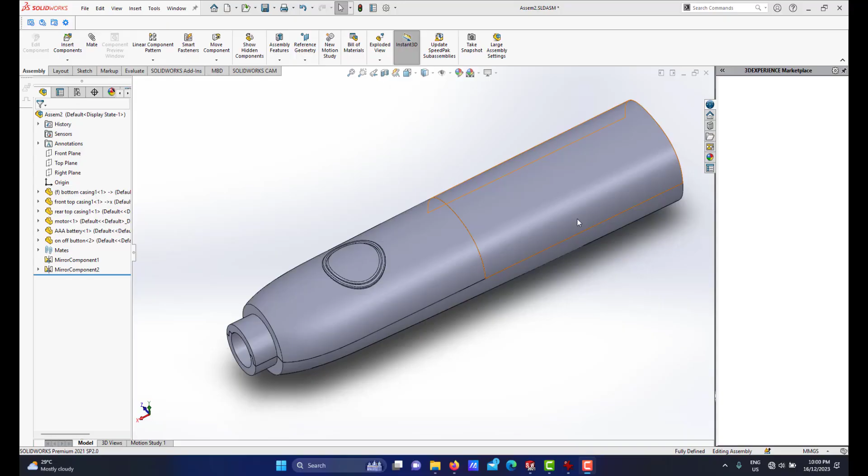Thank you. Alright, this video will be part 9 of my electric eraser Solidworks project. So in this video, I will do another part modeling, which is, if you look inside here, we have a component which is mounted onto the shaft. As shown in this photo, we have this thing. This is called eraser tip holder. It's a hollow cylinder. Okay, I already did the measurement for the dimension for this.

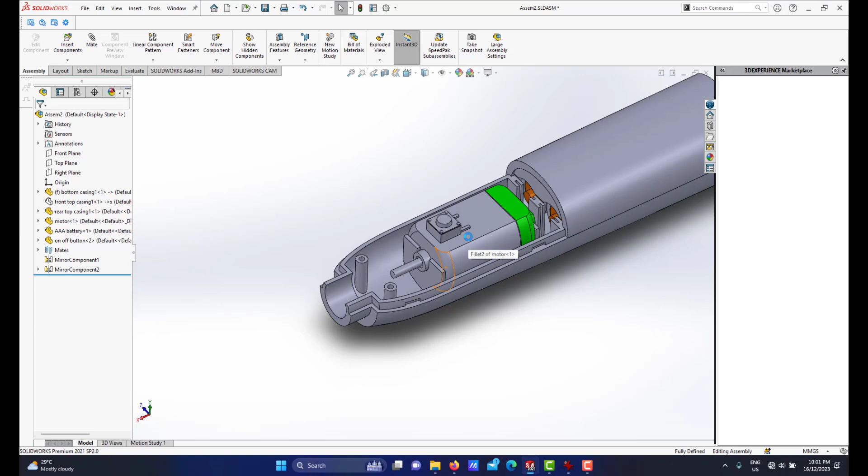Hold on. Okay, this is the dimension. Okay, in Solidworks, what I will do, I will create a new part modeling. For this eraser tip holder, I will do a separate part modeling, as shown in this photo. The dimension is there, diameter 7 here. So I will do it on the right plane.

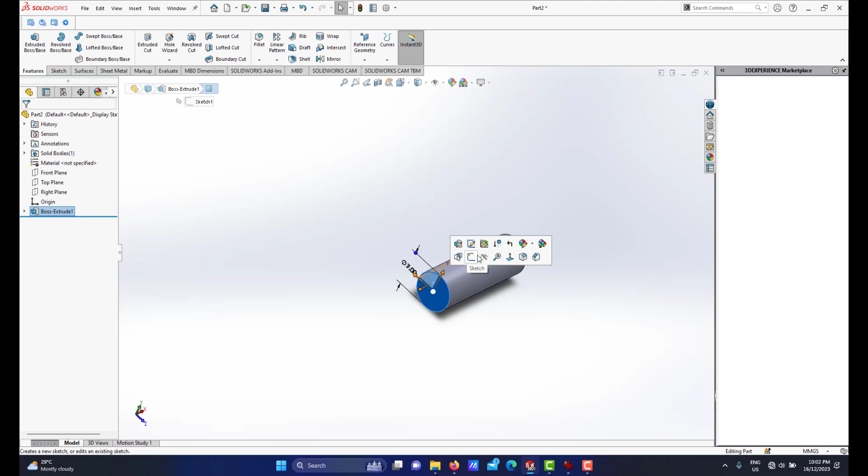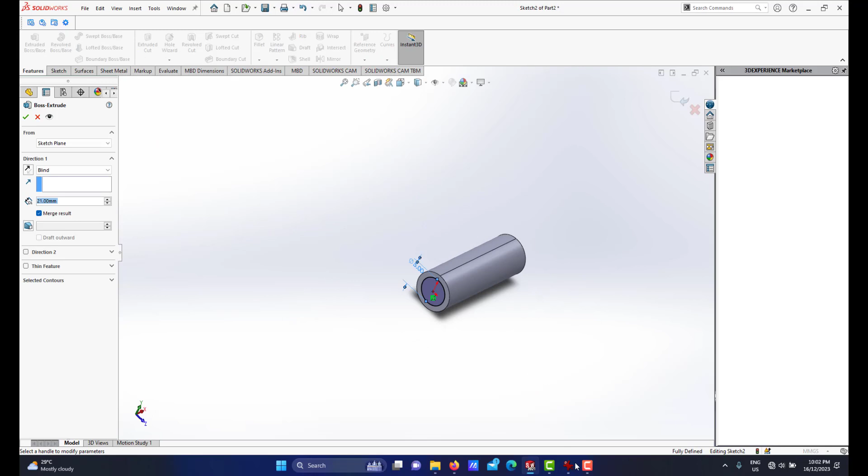I will extrude by 21. Alright, and here I have diameter 5. This one I will extrude by a distance of, I will put it 5 instead of 4.

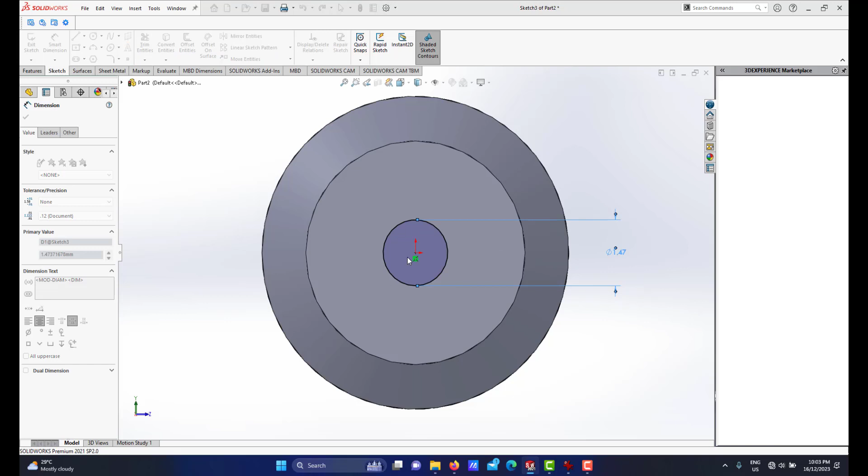Right, so here we have a chamfer. The chamfer will be 1 millimeter. Right, so then, since the electric motor shaft diameter is 2, we have a bore of 2 millimeter. Okay, let me save this as eraser tip holder 1.

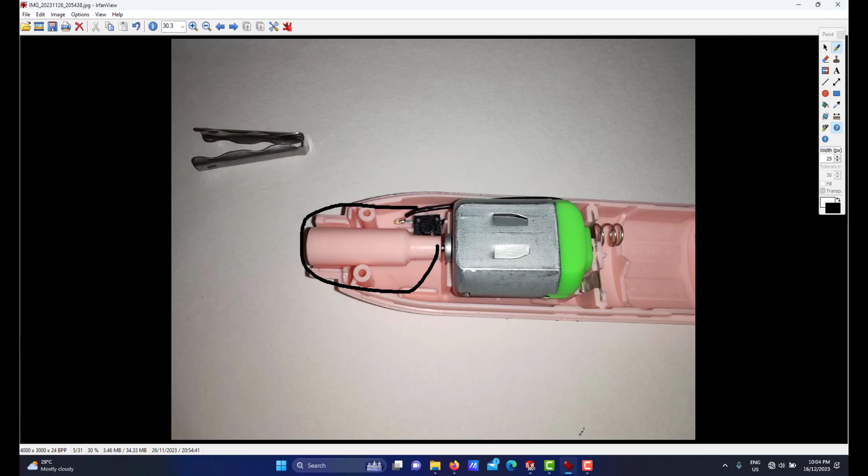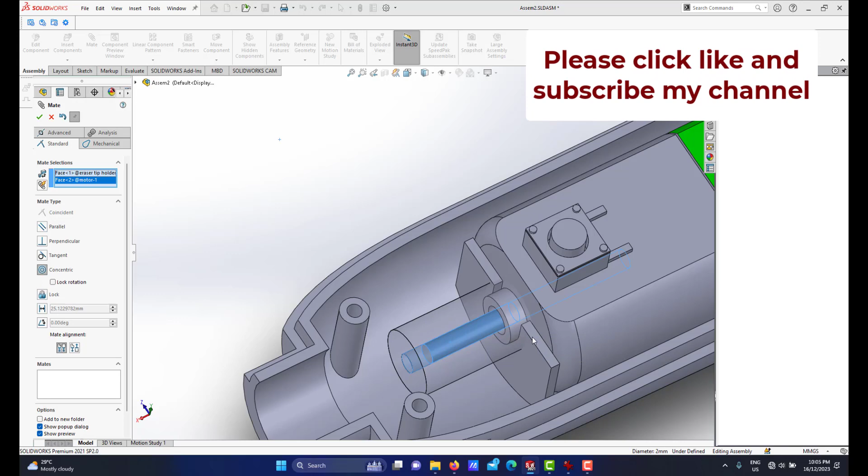Alright, if I go to assembly mode, I will insert this here. If you look in this photo, the side is like this. Then I will do mate. These inner holes will be concentric with this shaft. Then I click OK. I can drag it, and this face will go here. So it looks like it's in line at the same level with this surface. Now I've already done the eraser tip holder.

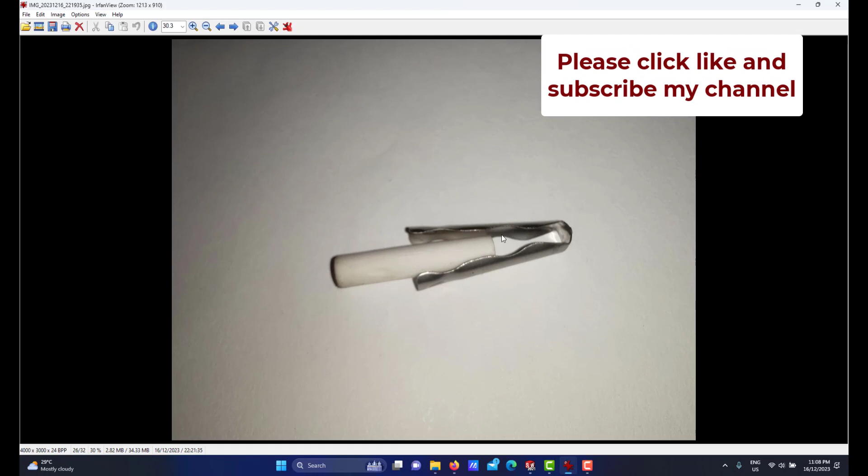Alright, my next move is this component as you can see in this photo. This is what we call the eraser gripper. I will do this component in Solidworks, and I already did a measurement, so I will not do the eraser gripper in this assembly, just a typical part modeling mode. So I already set the diameter at about 6 millimeter and the length is about 25.

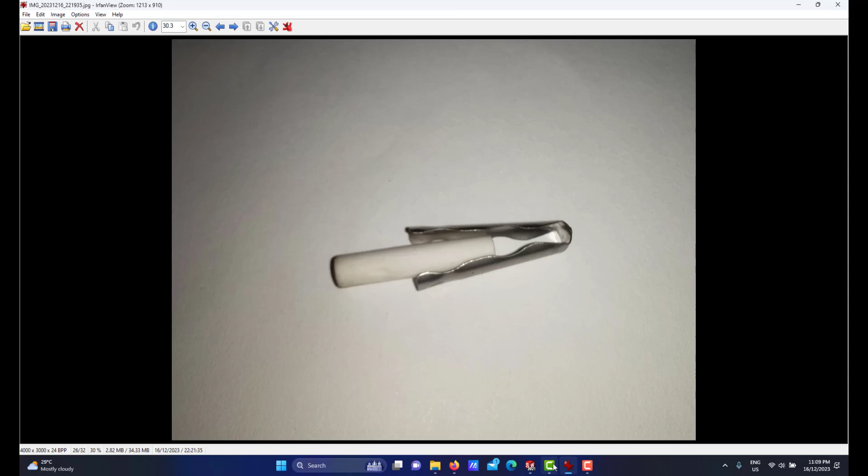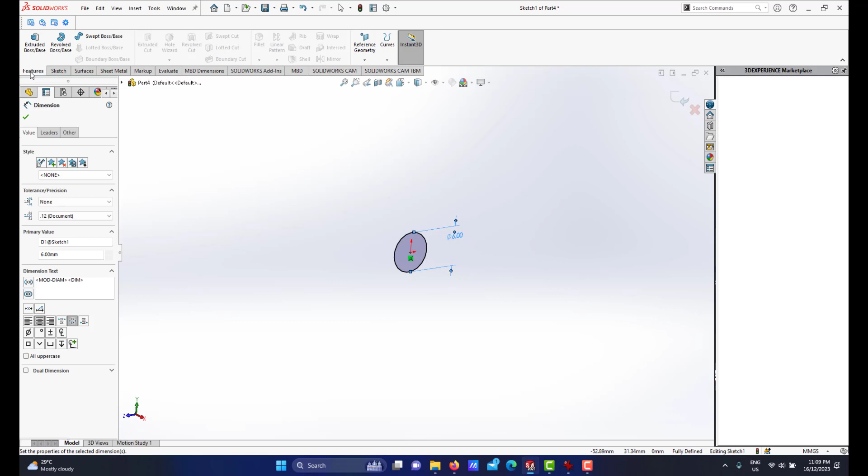Okay, on the right plane I will do 6 and I will extrude 25. Okay, next thing I will do shell. The thickness is 0.2 millimeter since this is very thin metal. As you can see, it's a very thin metal, it's about 0.2 millimeter, if I'm not mistaken.

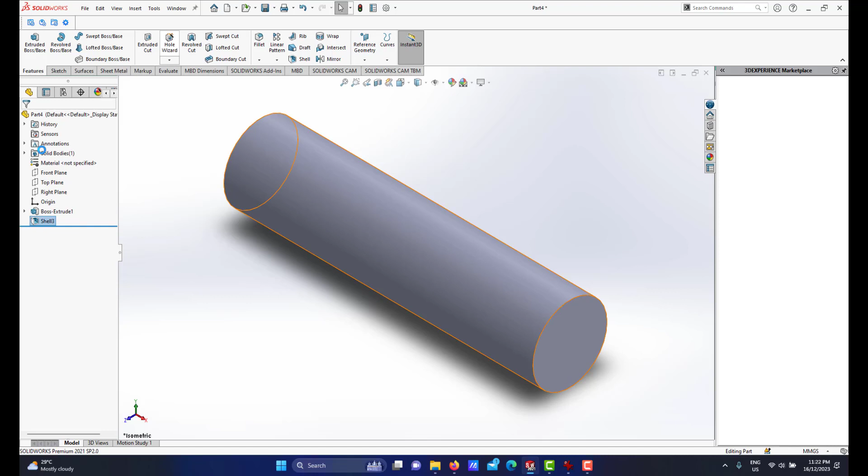Right, so if you look in this photo again, we have kind of like a curve here. It's a cutout. So let me go for standard view. We make it at the front plane. Okay, I go for hidden line view. So what I will do now, I will create kind of like this curve. I will draw a line from here like this.

Hold on. And it will stop here, because later I will do split. But before that, I have to put a relation here. So this line and this line and this line must be collinear, meaning they are in line. Same goes here. This point and this point must be horizontal.

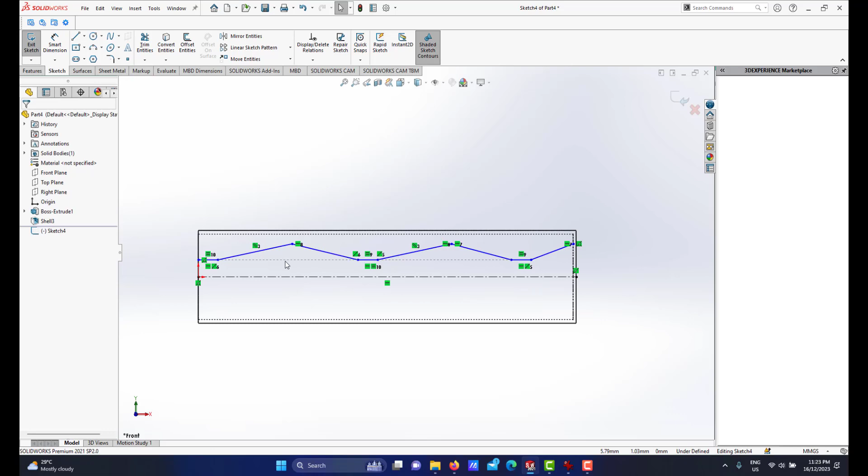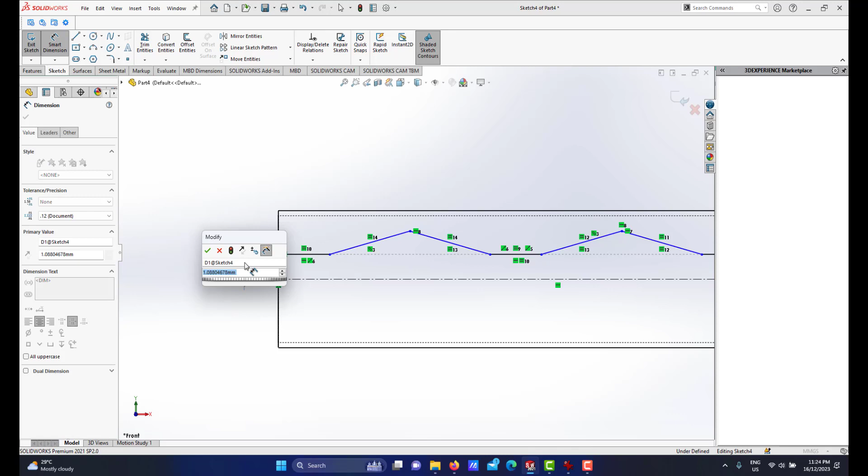All right, it is just a matter of doing some adjustment, and this line, just to make this equal. I just want to make this fully defined by setting the relations, and also all these lines are equal. Right, so now I'm putting the dimension from here to here, let's go for 1. And also from here to here is about 0.5.

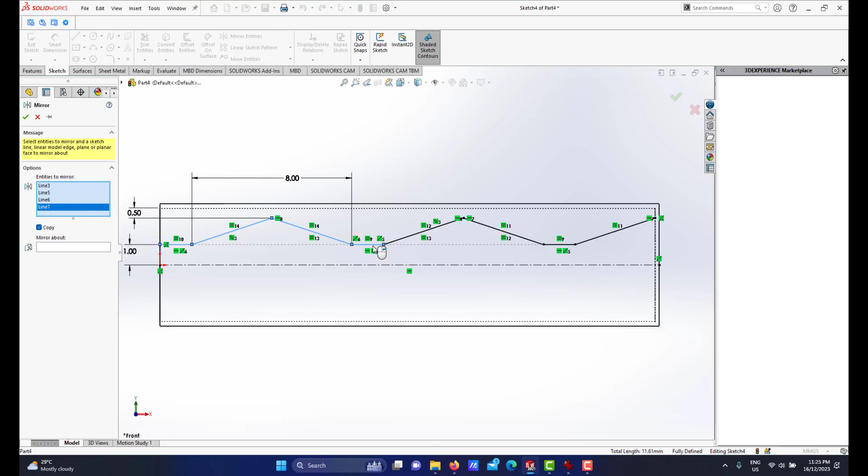And I need to give this, let's go for 8. Right, I need to mirror this. Okay, I will not do fillet for this curve, but I will do fillet when I have done the 3D after cutting out, because if I do fillet, sometimes the sketch will be over defined or there will be some errors. So I will keep it a sharp corner. Then I will do fillet after I've cut out.

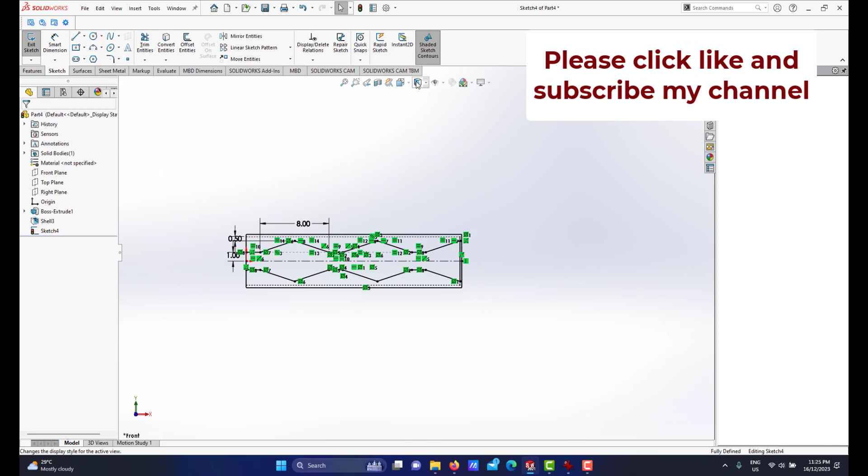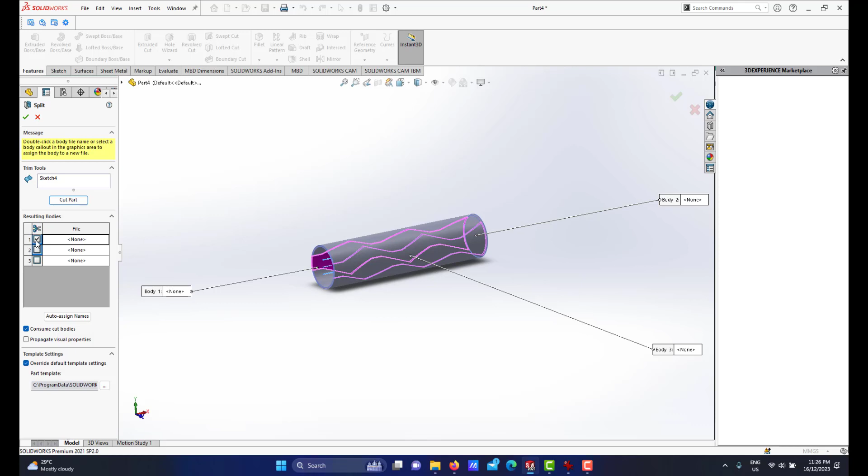So this line should be joined. So I have this. Okay, let me go for shaded view. Right, so this will be my curve to do the split. Okay, I will do split. So I will select this. I will do cut part. I will select the parts that I need to delete. This one and that one. Make sure the consume cut bodies is on. So I have this.

Okay, let me turn off this sketch. I have this, similar to this, but here it's curved, so I can do fillet. All right, let me do fillet. I have a lot of edges to fillet. Let me go for 5 first for all these here. All these corners here will be 5. So here.

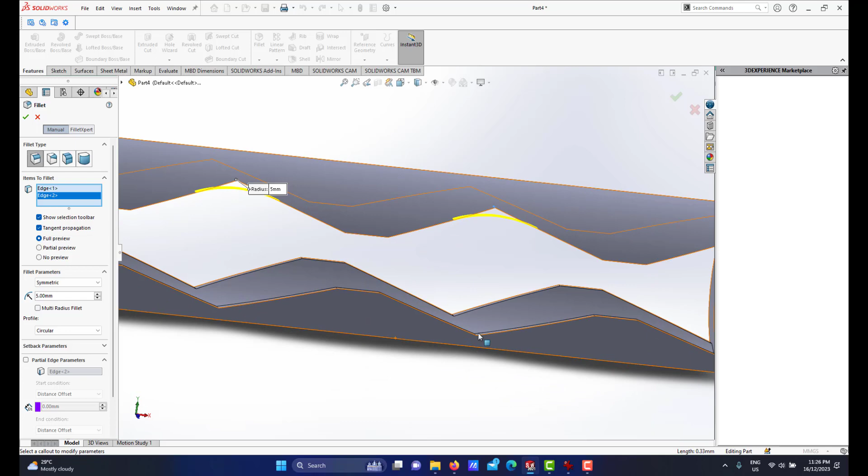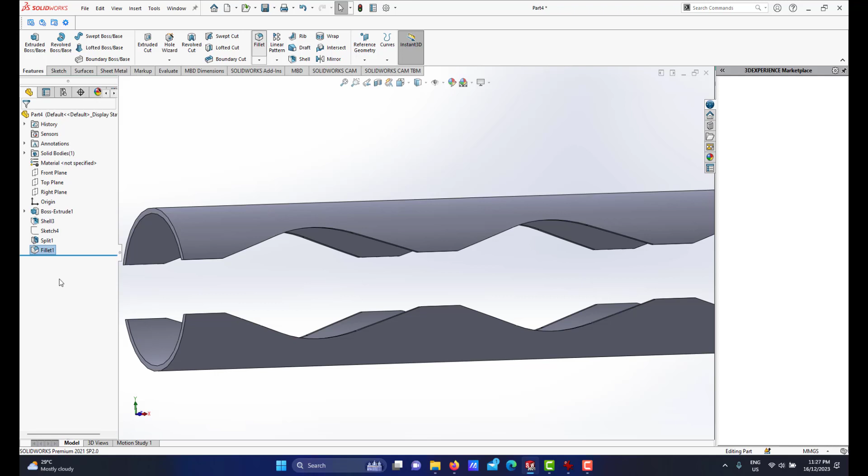Oh, the edge. And also this side. All right. So these will be 5. And the rest of the corners, I'll do another fillet of smaller radius. Let me go for 3. This one.

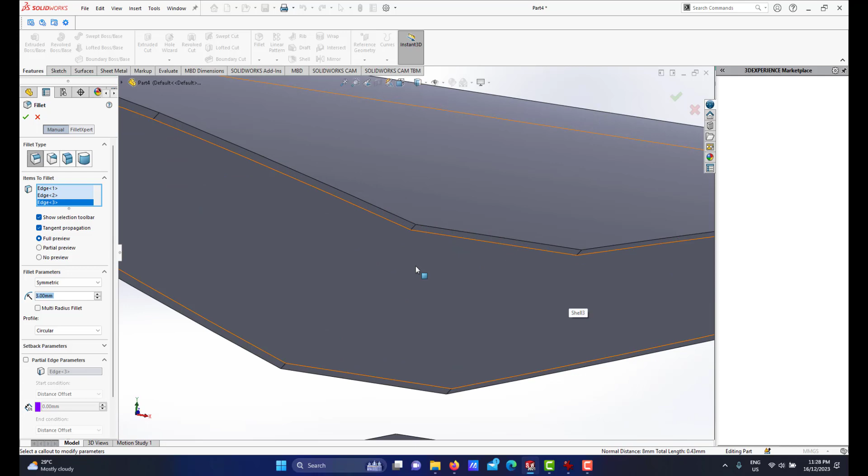Okay, let me pause this thing. Then after I've done, I resume my video.

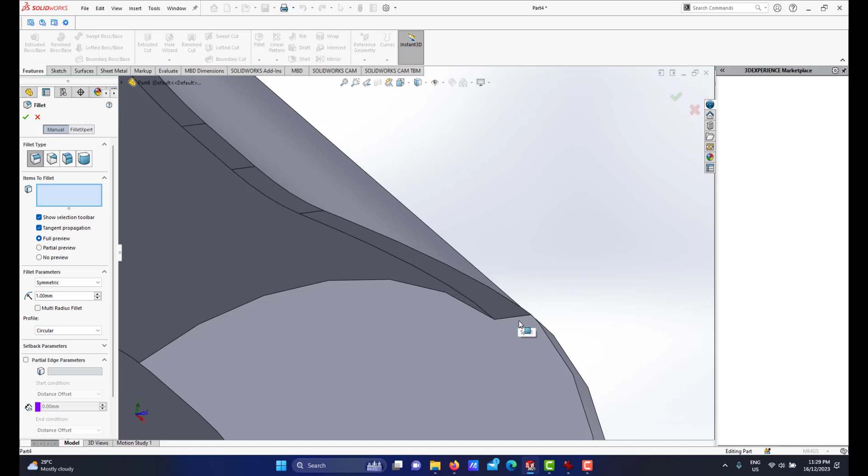All right, I've done fillet all the corners there, so I can have a curve. But for this edge, I cannot give a bigger fillet radius, so I will do a fillet with a small radius. I think the most that it can go is 1 for this edge. Carefully select the edge. Yeah, and also this one.

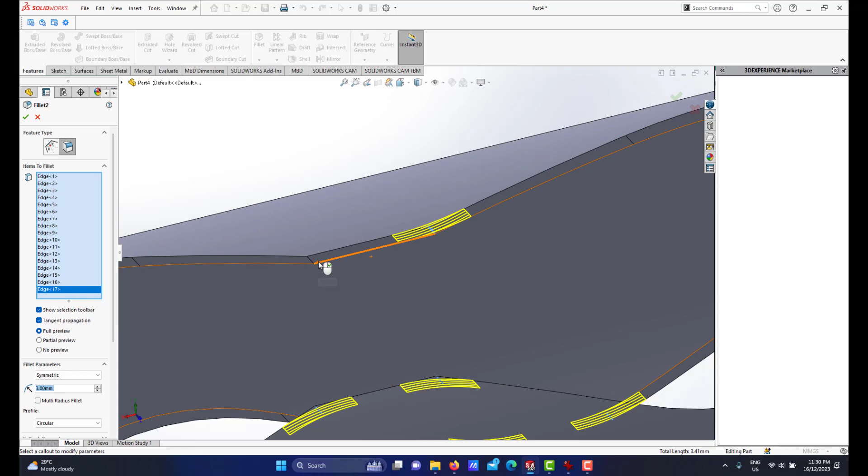All right. Yeah, that's one more curve that I missed. This radius 3 at the top here. This 3, right? Okay, I think it's okay.

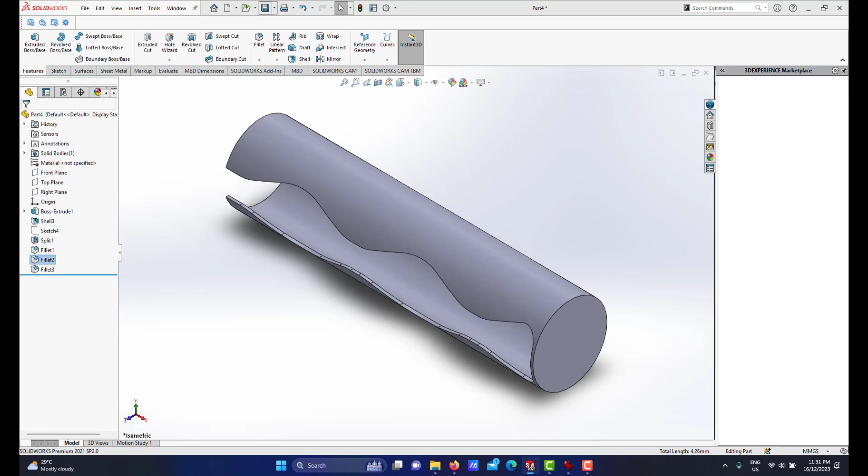It's good. All right, so I will save this file as eraser gripper 1. All right, in the assembly file, I will insert the eraser gripper 1 here.

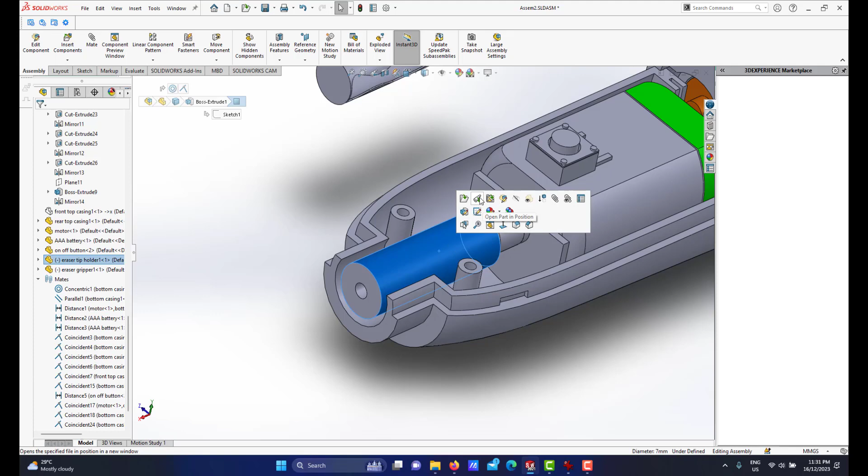All right, just one more thing before I do assembly of this. The eraser tip holder here, this hollow cylinder, actually this gripper will be mounted into here, but as you can see, this is on the bore of the shaft. So what it means is that I need to open back this eraser tip holder.

So I have to create a bigger bore here by the diameter of 6, since the metal gripper will be mounted onto this bore. So I have to make a cutout. Right, I have to make a cutout.

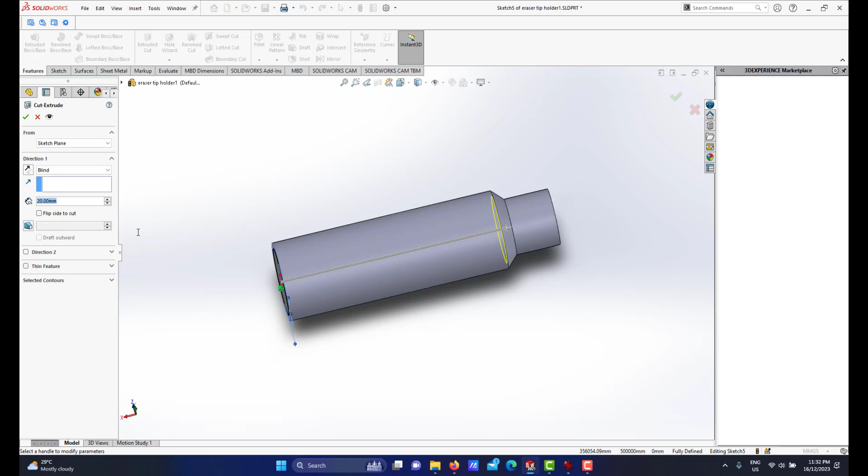I will do an extruded cut up until, let me go for value here, 21. Not 21, I go for 20. Hold on. I go for 19. Okay, we'll cut the hole until 19 depth. Alright, so I have a hole here. Let me save my file first.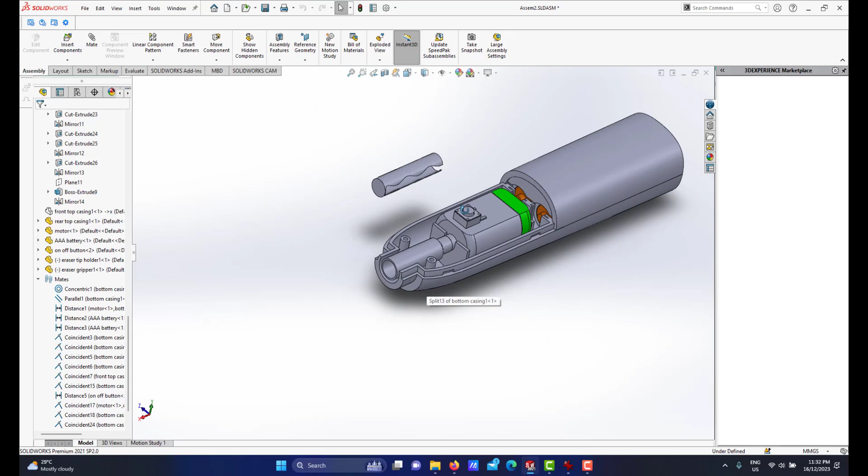Okay, in the assembly, let me go for section view. Alright, I will do a mate setting. Okay, this cylindrical face will mate with this. I click OK. Let me try this thing.

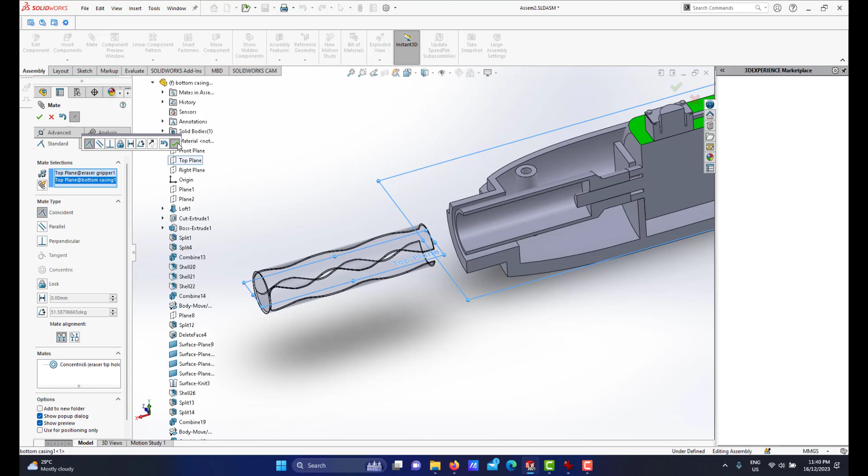Okay, another thing is the orientation here. My next mate setting is that, hold on, let me turn off this. The top plane of this eraser gripper will mate with the bottom casing top plane. So I need this kind of orientation. Hold on. Right.

Okay, another thing about here, there is this face and the end face of the shaft. I need to go for anti-align. Let me click OK. And I click OK. Right, let me click OK first.

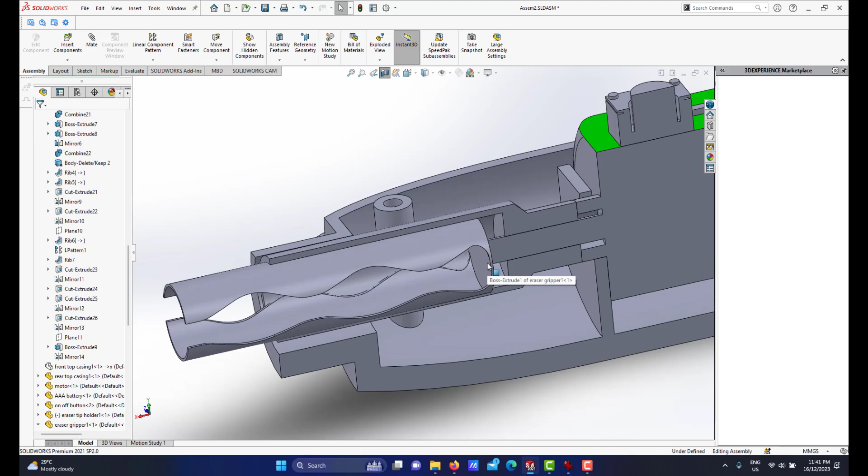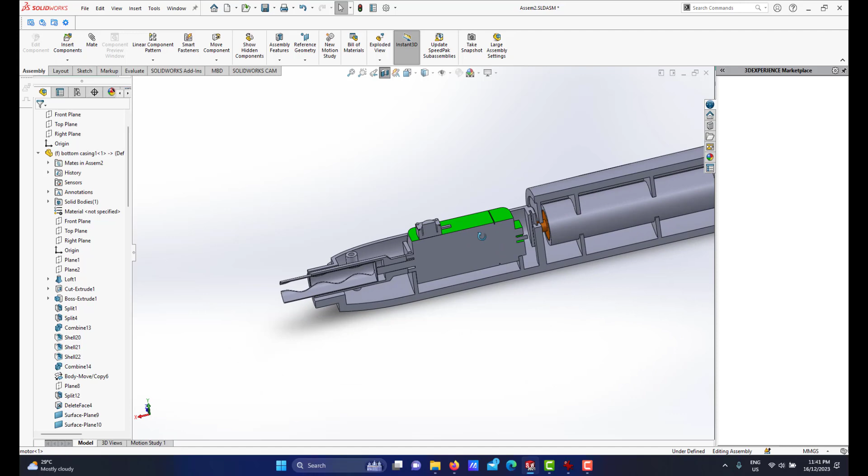Then let me turn off this, and let me turn back on the section view. Alright, nice. So everything is in position. And let me save my assembly file.

Right, my next move is to do the last component of this electric eraser, which is the cap. As you can see here, we have the cap here. Okay, in order for me to do the cap, let me turn back on my front top casing. So the cap will be mounted here.

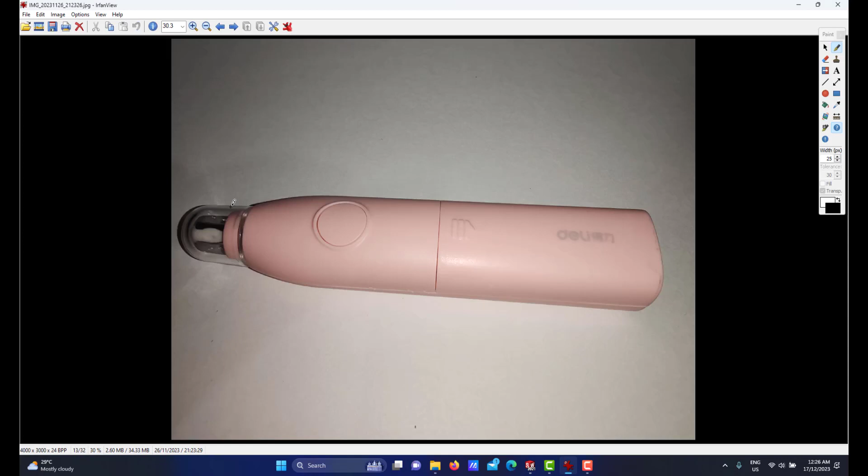So before I do part modeling of the cap, here we have the Evaluate tab. I can do Measure. I need to know from this face to this face. Okay, if you see here, the dx or normal distance is 19.2. So it means that if I want to create the cap as shown here, the length must be greater than 19.2. By the way, I forgot to mention that I have already inserted a rubber eraser here.

Okay, for the cap, the length must be greater than 19.2, from this face to this face. So I will make my cap length 22. And another thing, my cap will be mounted on top of this surface. The radius of this curve is 6.5, so it means the diameter is 13. Okay, I will go to part modeling mode.

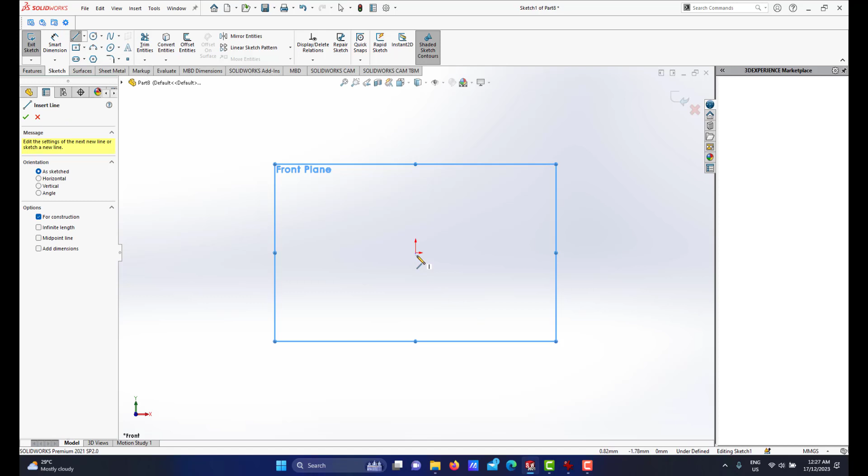Okay, the way for me to do this is I will do a revolve. So I will go on the front plane. I will create a center line of a distance. Since it must be greater than 19.2, my length will be 22. And since my radius is 6.5, this will be the radius 6.5.

So the way I do this, I will do a revolve by creating a 2-point spline. Before I go for the 2-point spline, I create a line here. The distance is 5.

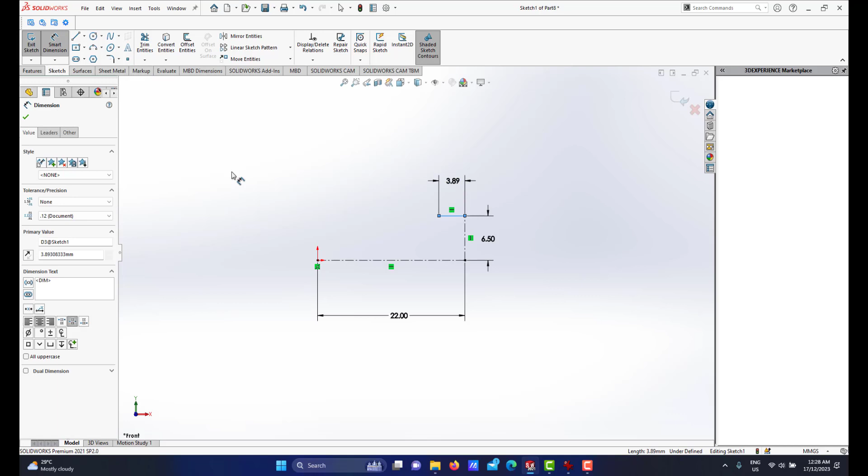Then I will do a 2-point spline from this point to here. So for this point, I will drag the handle and make sure that this is vertical, and also this handle is horizontal. So I will drag kind of like this. I have this shape.

So the idea is vertical. When I do revolve, it maintains the tangency. So it means at the end it will not be pointy if I do revolve. Alright, I think this is good now. Okay, since I need to revolve, I have to make this a closed shape.

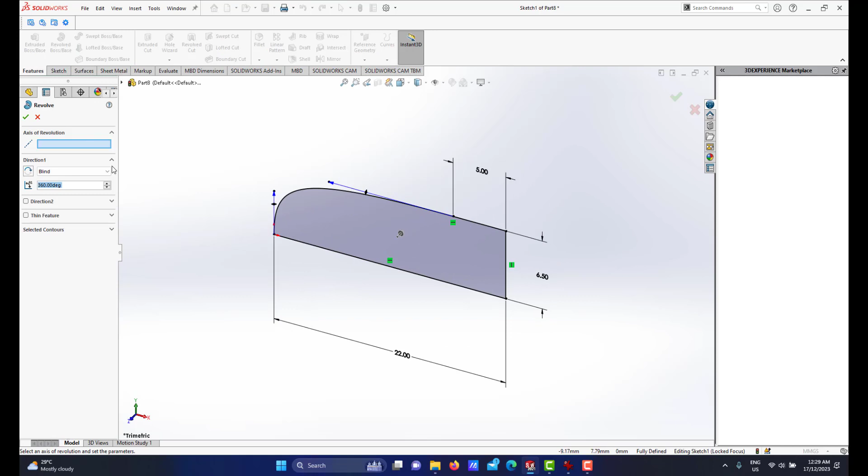Right. Then I will do revolve boss base. My axis is here. Then a full circle. Right, so this will be the cap. So what I will do here, since this is diameter 13, I will do, not offset, sorry, I will do shell outward, and the thickness is 2. I will select this face and make sure shell outward is like that, so it will go bigger like this.

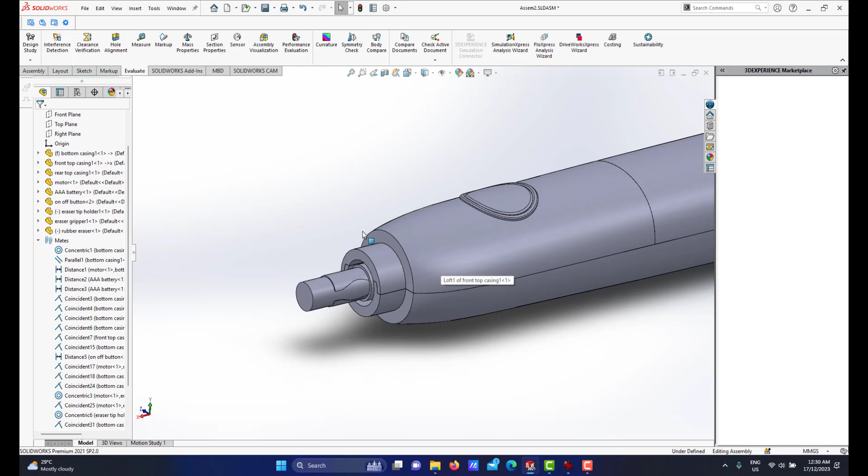So let me save this file as cap 1. Alright, if I go for assembly, under assembly I will insert cap 1 here. Okay, I put it here. Right, then we'll do mate. The cylinder face will mate with this one.

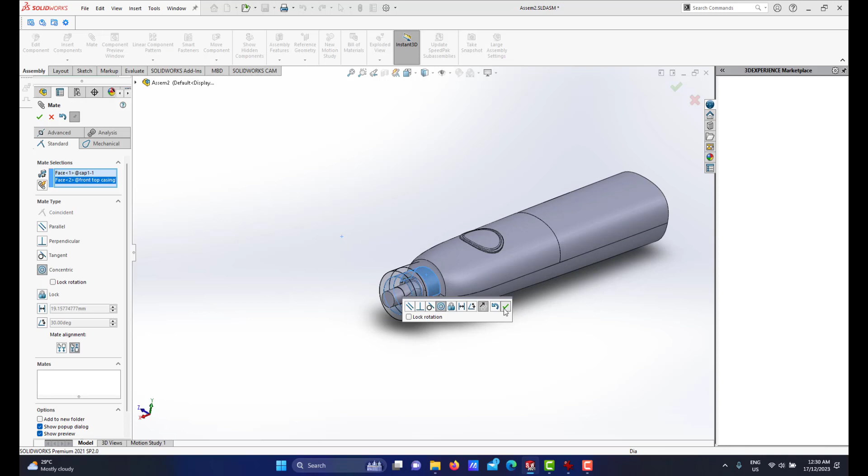Click OK first. Let me drag this thing, and here and here I will go for anti-align. Ignore this message, simply OK, then I click OK. Right, I click OK first. So this will be my cap. Okay, if I go for section view, just to check whether there is any interference. So it looks like

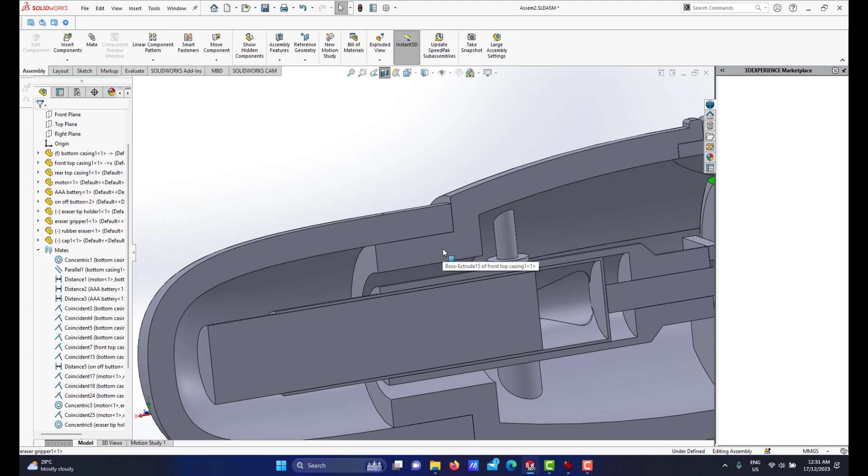okay, this is okay. Alright, one more thing about this cap: this cap cannot just fit like this. I have to make features, what we call a key and a groove. So for the opening of this top casing and also the opening of this bottom casing, I will create a key. But for this cap, on the inner surface, there will be a groove. So when we push the cap, it will snap fit into this top casing and bottom casing.

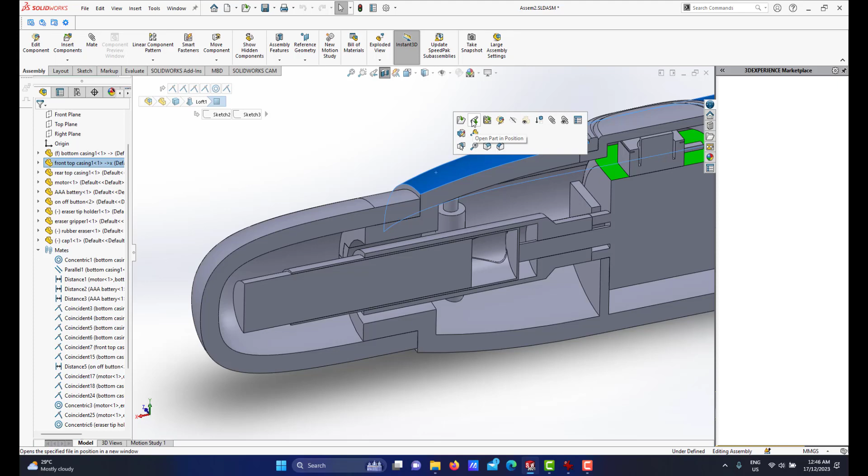Alright, to create these snap fit features, I will create a key at this top front casing here, and also a key at the bottom casing. So for the cap here, it will be a groove. All right. Okay, to do this, I will open this front top casing here in position. So this is my front top casing.

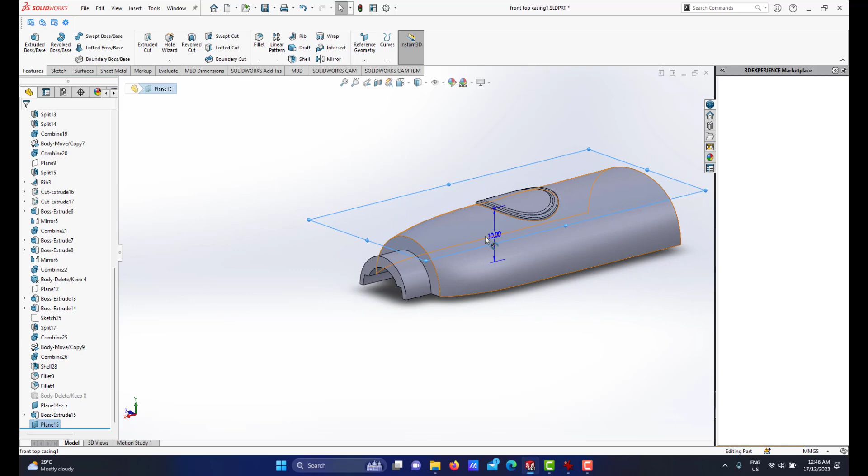Okay, I already created this plane here. It's a little bit above this, at the front end of this front top casing. So this plane is good for me to create this. Okay, so I will start from this midpoint to this point, a center line. For the position of the key I will do a center rectangle. Right, make sure that the center rectangle is snapped here on the line.

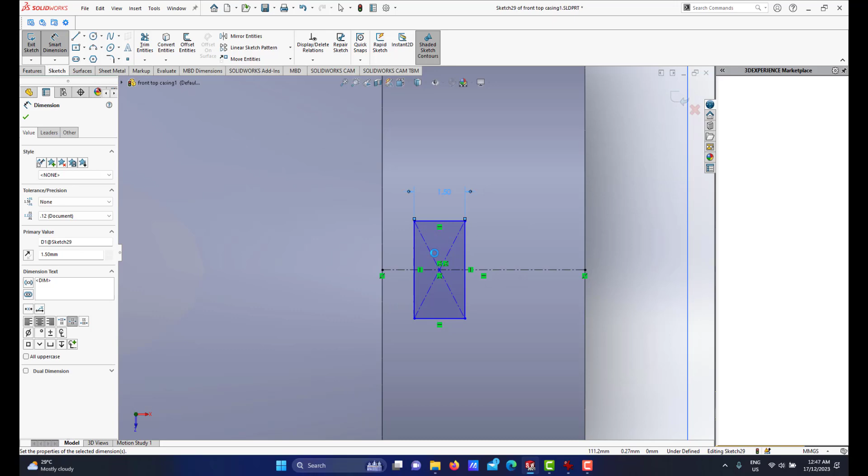Then I will give a dimension of, not too much, about 1.5 for the width. Right, 1.5, and the distance here is about 2. And another thing to dimension is from here to here, which is 1.

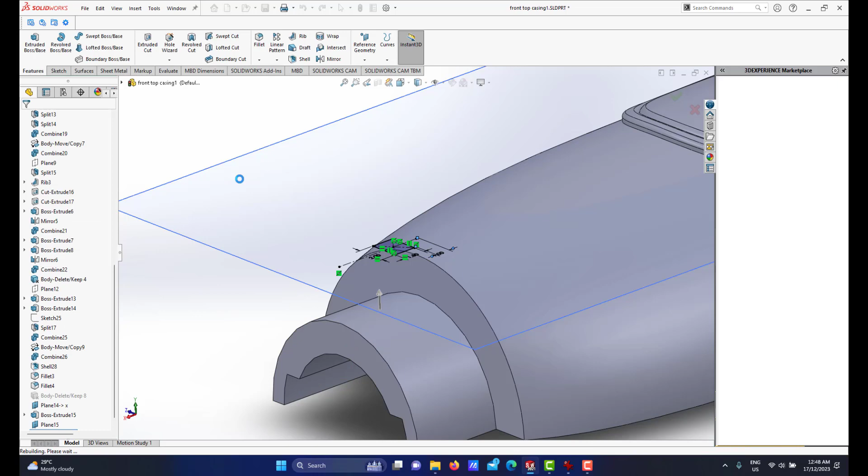Okay, what I will do here, I will do features, extrude, and I want to use sketch plane, start from this surface, and the distance is about 0.5, not too much, just a small key, and make sure merge result is checked. Right, so this feature will act like a key. Right.

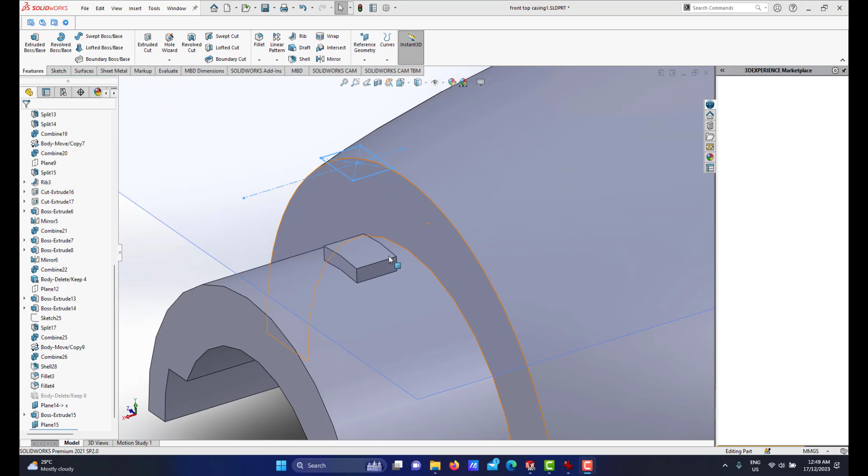Okay, since this is 0.5 the height, I put not a fillet, I go for chamfer. Okay, I'm using distance 1. This is much better: asymmetric, distance 1, distance 2. It means that I have to go for reverse, so this is 1, and this is 0.5. So I have a much better chamfer. So this will be the key of this front top casing. Let me save my file.

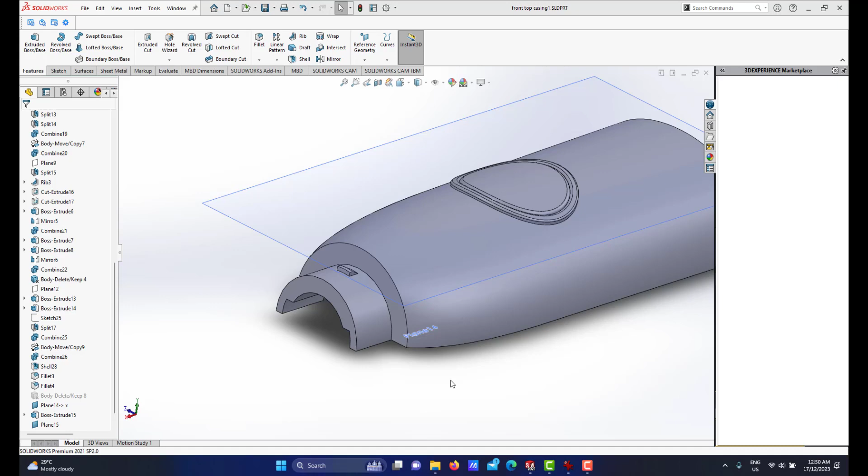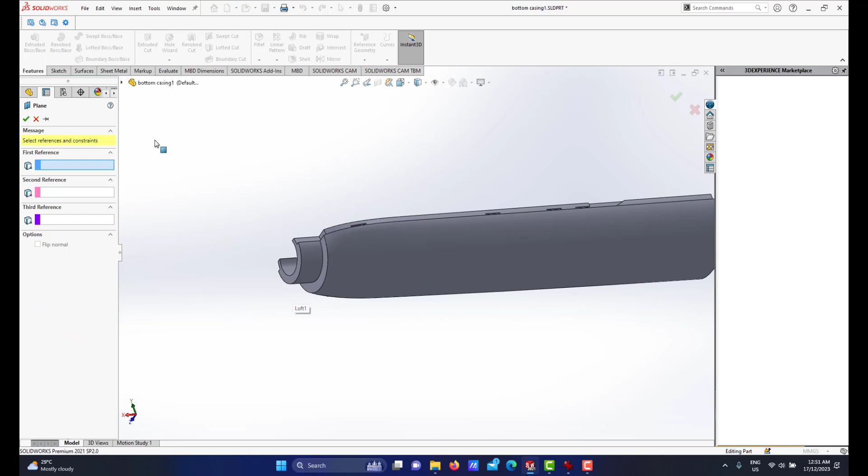Right, if I go back to the assembly file, I have these features here, but I still have to create the groove for this cap. Alright, for the bottom casing here, I need to create the same. Okay, let me open in position. Hold on. Okay, now I have to create the same features at the bottom. So that means I have to create a plane. Start from the top plane and I go for flip direction. So this plane is good.

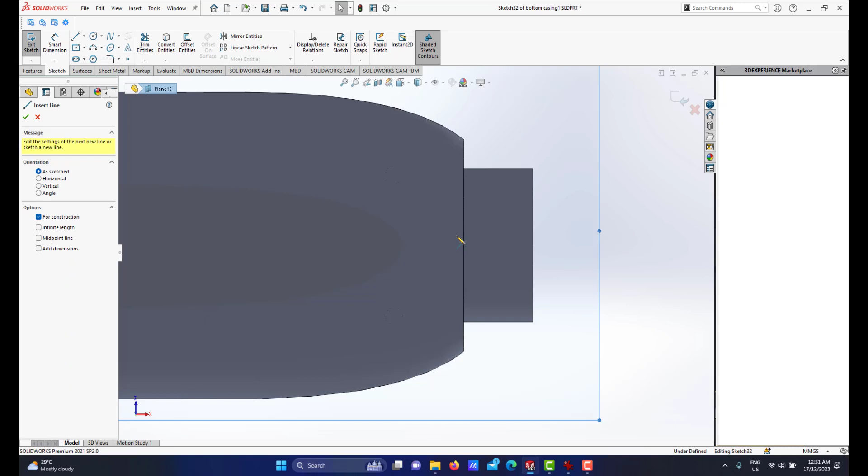Alright, I should flip to the other side. And from this midpoint to that midpoint, I will do the same features. The dimension here is, oh, sorry, this is 1.5. And this is 2.

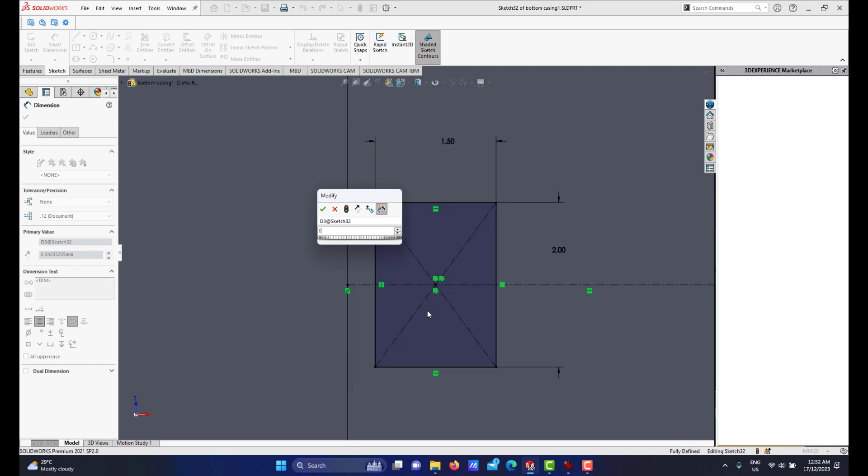Distance from here is 1. Okay, I will create extrude. Direction is reverse and start from the surface and 0.5. Okay, and I will do the same. I will create

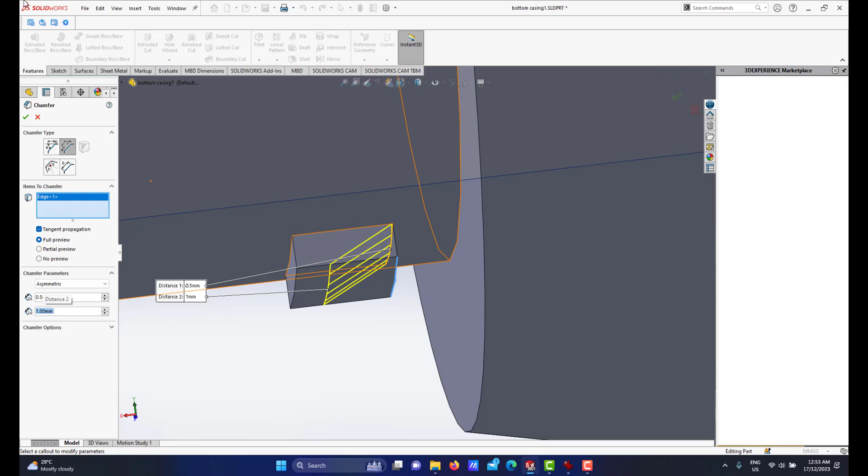here. I will create a chamfer by distance 1, distance 2. I will select this edge, so it should go asymmetric. Here is 0.5 and here is 1. So I have this bottom key. So it will act like snap features.

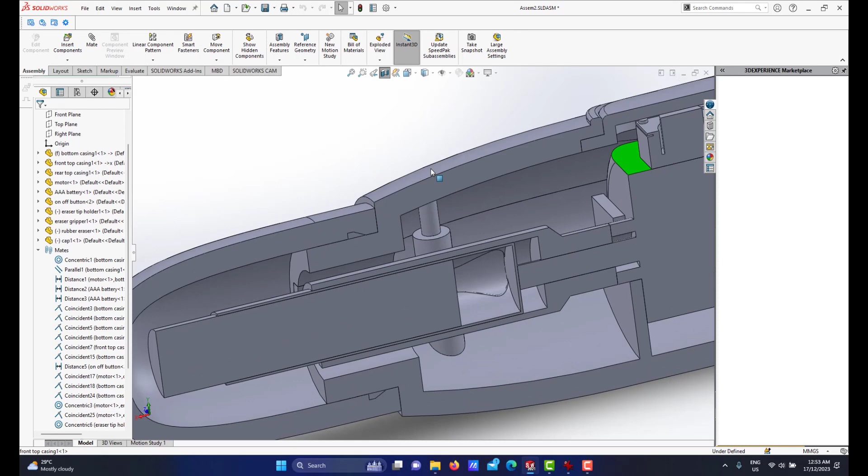Alright, so then I will save this bottom casing. Let me save this bottom casing and let me check the assembly file. Alright, so both the front top casing and also the bottom casing have this feature. Okay, for the cap I have to create the groove. Alright, for this cap,

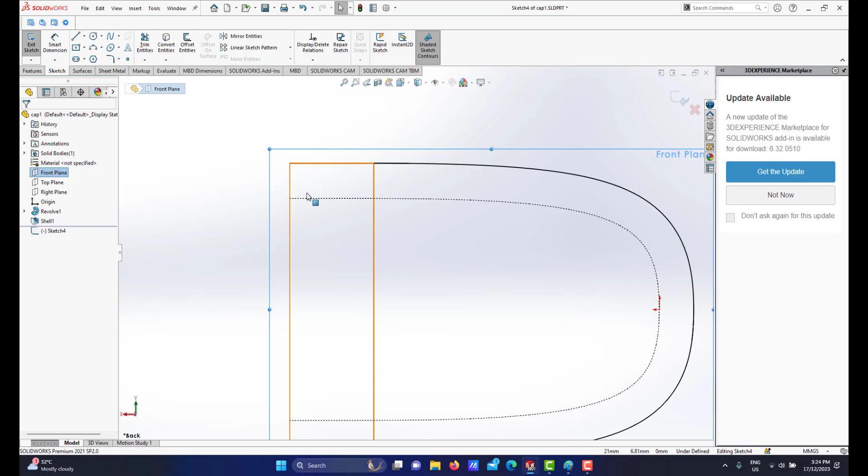okay, I will open this cap as a typical part modeling file. So let me go for standard view. Right, I will do a sketch at the front plane and I will go to the other side and I will go for hidden line. Okay, for this cap I will create a groove, a cutout here, so I need to draw a sketch here, the same shape as the key for the front top casing and bottom casing that I have just created.

So for here I will do a revolve cut to make the groove. So I will draw the center line from this middle point. Alright, then I will create a sketch with the same shape as the key that I have just created. Make sure that it snaps to that. Okay, up until here. So for this edge, I select this edge and convert entities and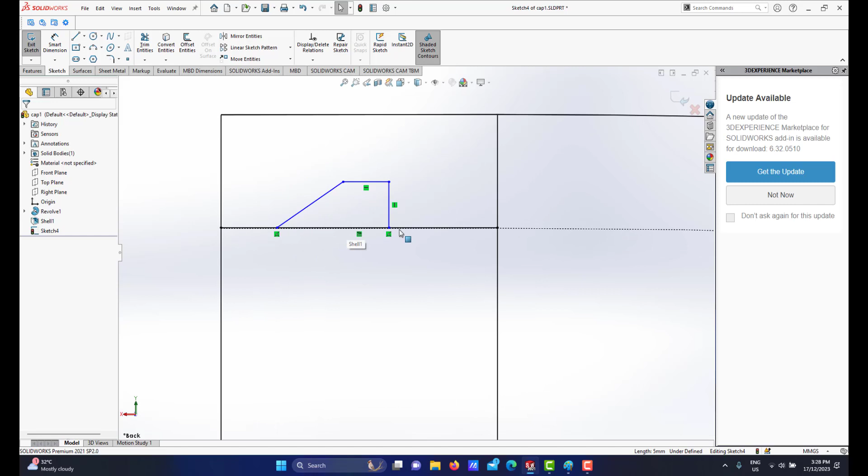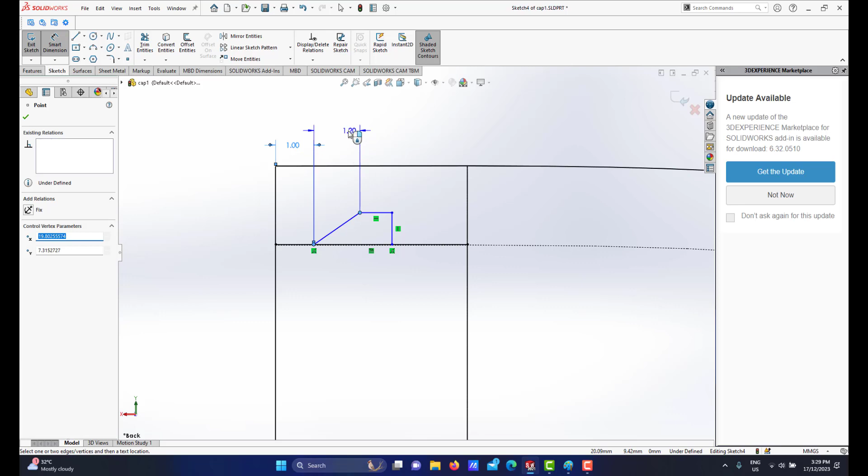right, so I will give a dimension from here to this line. It's 1. Right, from this point also 1. 0.5. 0.5. So this shape, then I will do trimming. Right, this is not a straight line, this actually is a curve of the edge here. So this profile, I will go for shaded mode.

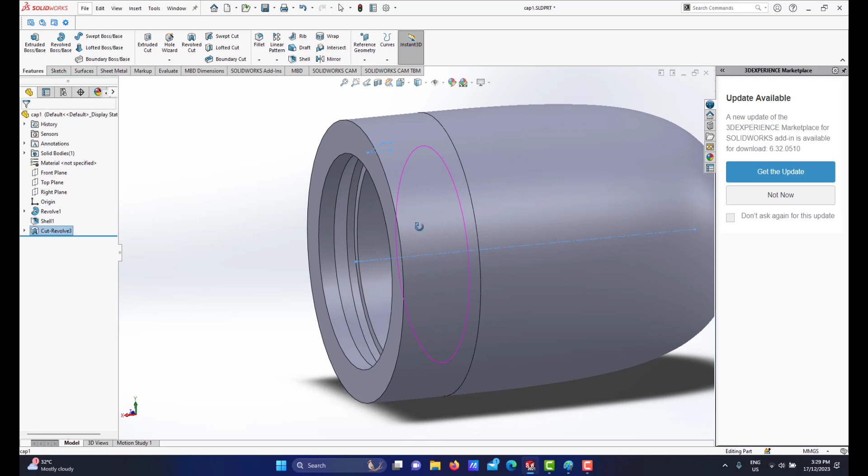So I will do revolve cut. So I have the groove, the cutout that will create the groove for this inner surface of this cap. Let me save my cap file, and if I go to assembly, right, as you can see automatically, we have this cap and we have the groove, and it looks like the key of the front top casing is nicely fit, and also the key of this bottom casing nicely fits into the groove.

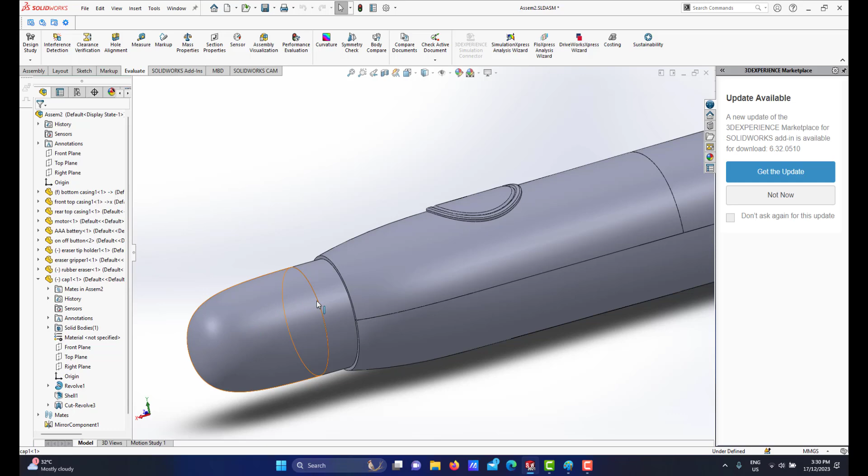So this will act as snapping features. So it means that this cap will kind of lock by the key and the groove, right? Let me go for this view and let me save my file. Okay, let me check again. Yeah, I think I have completed all the parts of this electric eraser, but okay, let me check again.

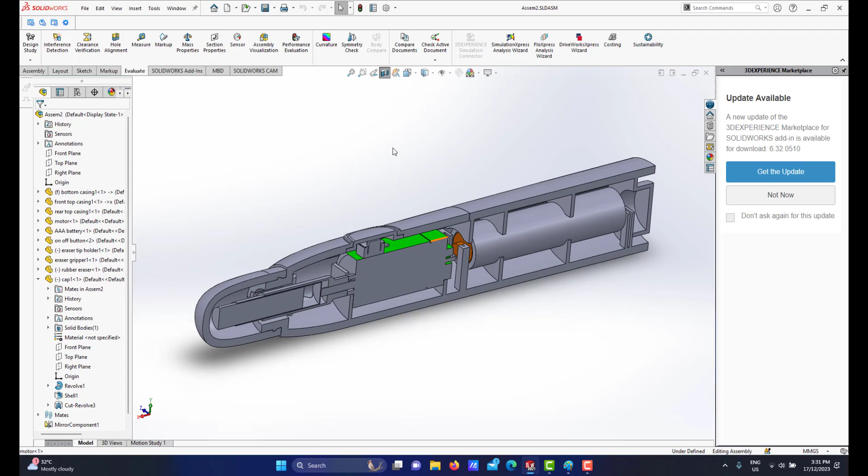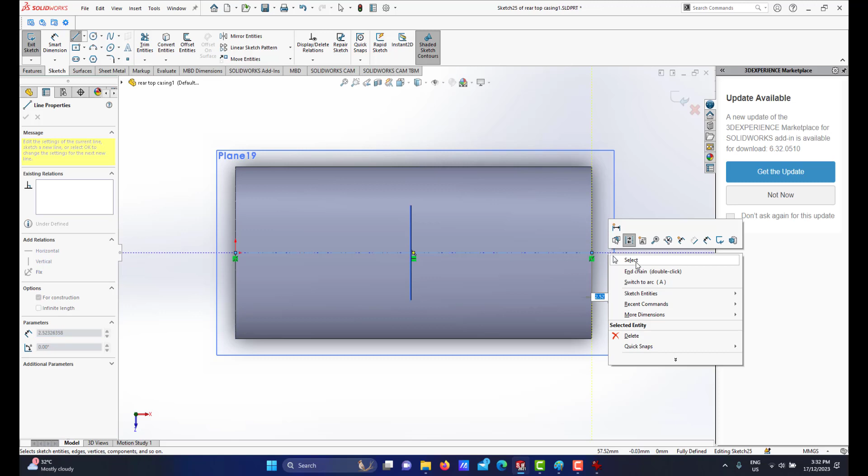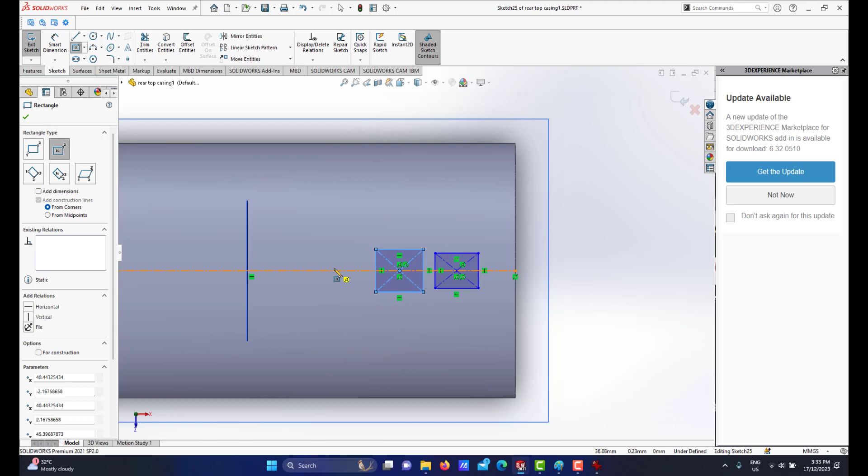Alright, at this plane I'll create a sketch, and I create a center line first from here to here. So since we have this pattern in this direction, in my view orientation it should be in the other direction. So I just create like this, and I just simply create. I will give a dimension of 1.

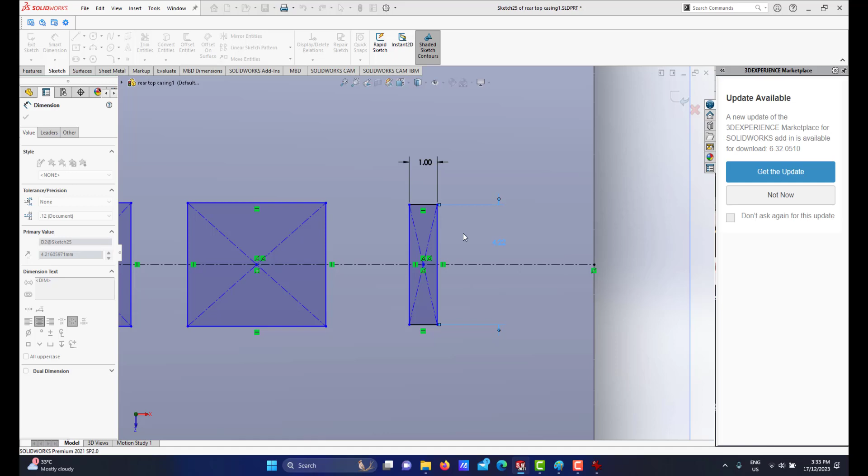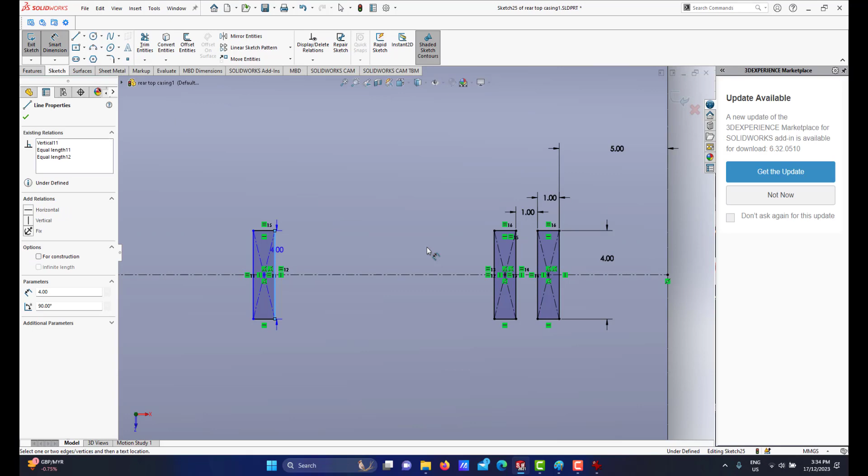So I will select this. I could make a linear pattern on this, but this is just a basic way of doing things. And from here to here, just giving a dimension of, let's go for 1. Right. Okay, make it 3. Then the last one was supposed to be a triangle.

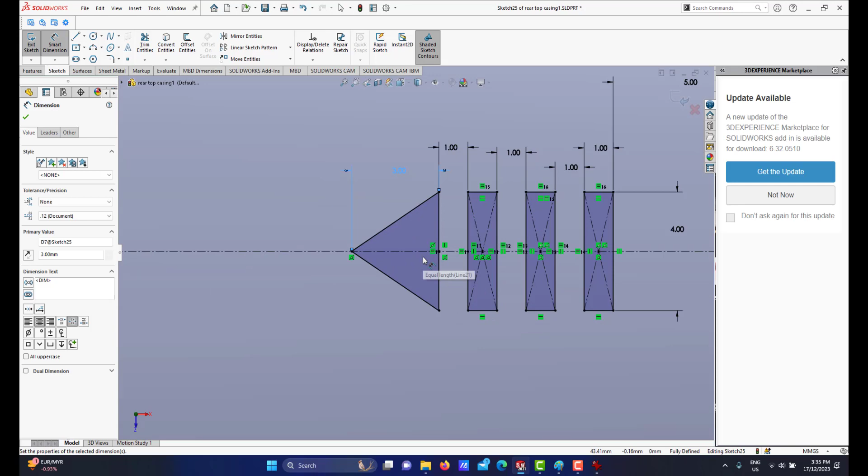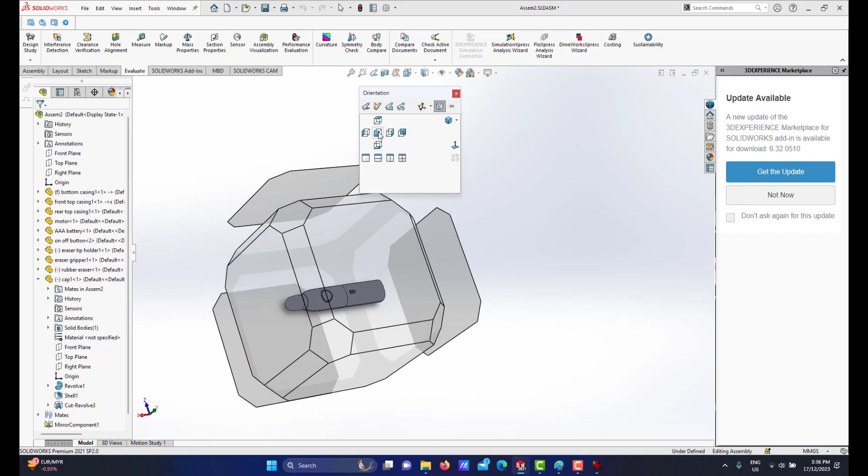Right, this kind of pattern. Okay, this pattern will be extruded from surface, just 0.5. Okay, let me hide this. Alright, let me save this file, and okay. Alright, I have this turn, then I go for this view, and let me make a last check.

Alright, Alhamdulillah, I believe that I have completed all the parts modeling for this electric eraser. So this video is not meant for me to show you how to do assembly, but as you can see, we already have done the assembly. But inshallah, in the next video I will show you the proper way to do assembly for this electric eraser. Alright, Alhamdulillah, I have completed my part model for this electric eraser. Okay, inshallah, I will see you in the next video.